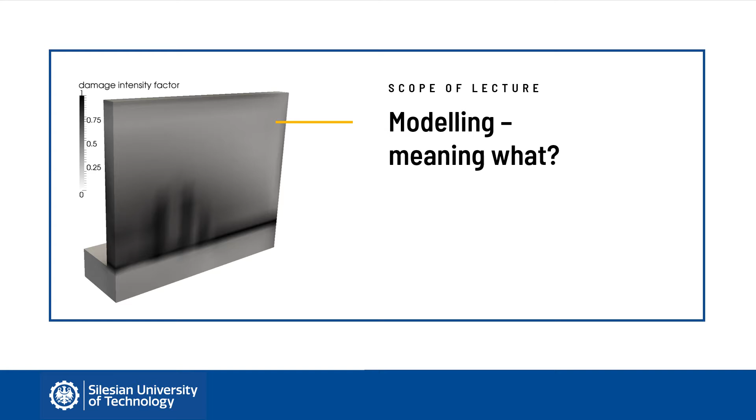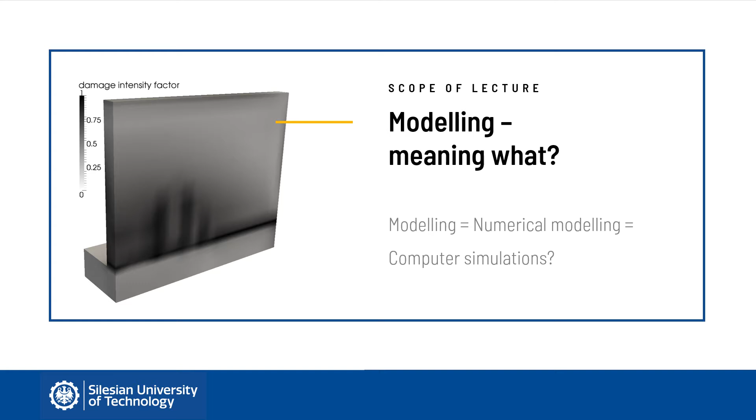I find it necessary to start with an explanation of the term modeling. Modeling is commonly associated with simulations of structures with computer implementations of mathematical models. Its meaning, however, should be broadened. By modeling, we should understand any activity in which a model of the structure is created to study its behavior under specific conditions.

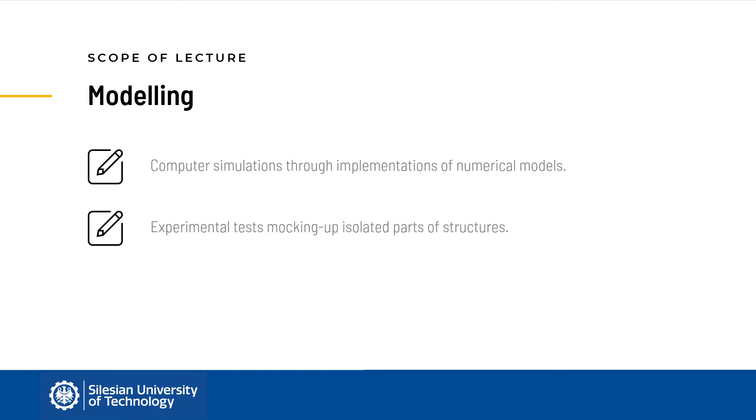Regarding reinforced concrete structures, modeling of cracking will of course mean computer simulations of cracking, its initiation and propagation, as well as prediction of crack width. Modeling of cracking, however, relates also to experimental tests in which isolated parts of the structure are mocked up to study the crack formation mechanism, cracking patterns, and crack width. The last but not least important aspect of modeling of cracking regards creation of analytical models derived from reinforced concrete mechanics. Such models are used to formulate calculation procedures for crack control in design codes.

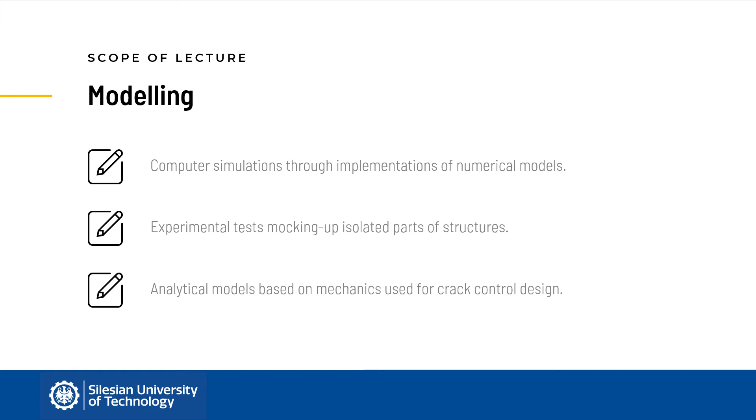Although my today's lecture will focus on conventional understanding of modeling by computer simulations, I would like to make some brief comments about other before mentioned aspects. However, to facilitate understanding the lecture, I will take liberty in making some introductory notes on the phenomenon of cracking. After that, I will briefly discuss how the real behavior of structural elements can be studied on a laboratory scale. I will make a concise overview of the analytical models used for crack control. Only then I will move to the main part of the lecture, in which I will introduce you to the approaches used in modeling of cracks, present damage and failure criteria developed for concrete, and discuss how to model the bond between concrete and reinforcing steel.

This being said, let us start with shedding some light on the background of cracking in reinforced concrete. In general, concrete cracks because it is a brittle material when subject to tensile strains. Nevertheless, cracks which can be formed throughout the whole life of the structure may have different origin, behavior, and effects on the structures.

The cracks may form as early as in the fresh concrete, around the time of setting, when concrete is still in plastic state. This early damage to concrete is usually manifested by a pattern of hairline cracks visible on the surface of the element.

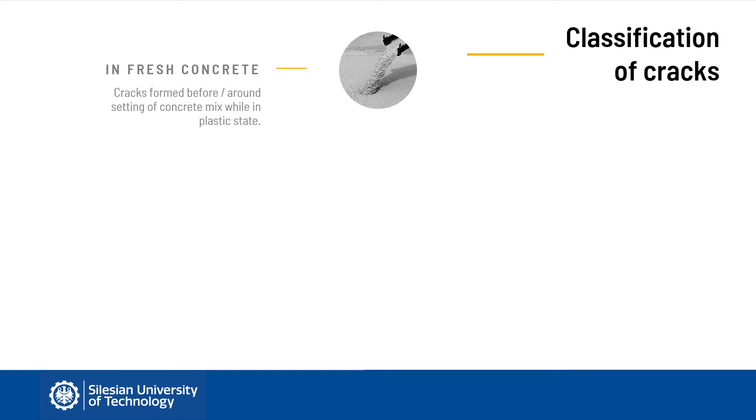Significant cracking can occur during the period of hardening of concrete, which may have significant impact on the structure during its service life. These early age cracks are formed due to the restraint of imposed deformations caused by cement hydration and may reach significant heights, depths, and widths, often exceeding allowable limits.

These cracks can grow further in hardened concrete when service loads are superposed on the structure. The most well-known cracking is that observed in mature concrete, which is caused by mechanical loading acting on the structure during its operation, but also other actions such as additional imposed deformations during service life.

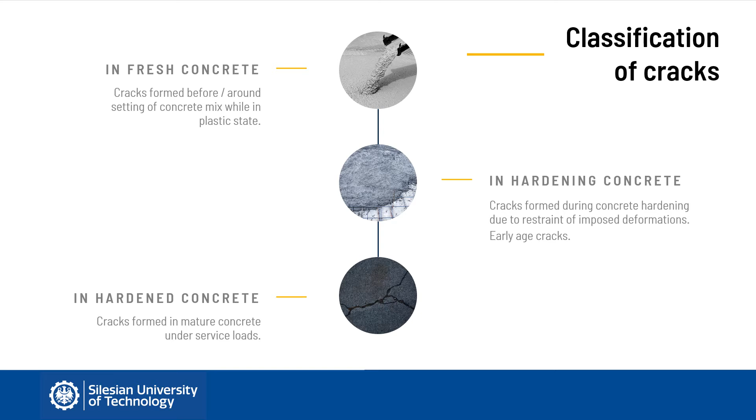Whatever the source of cracking, cracks can be further classified into macro and micro cracks. Micro cracks are small, pore-sized discontinuities in concrete components. They can be formed within the mortar or less frequently in the aggregates. Delamination between the aggregate and mortar is also not uncommon. They usually have random character and are spread over a larger area or through the volume of the element.

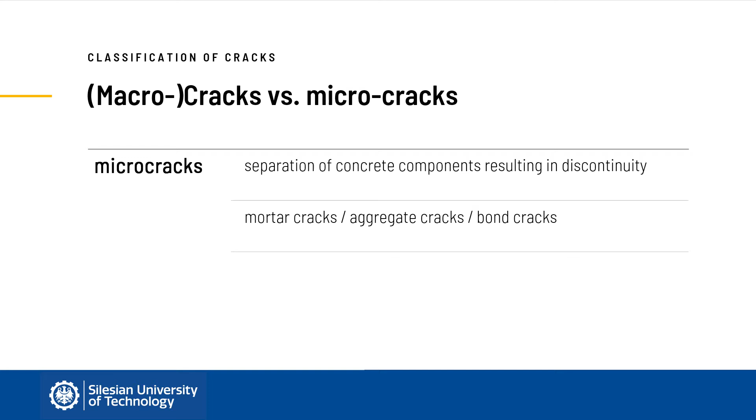Macro cracks, in turn, are what we usually call cracks. These are large cracks of considerable height and depth. The most important characteristic which distinguishes micro and macro cracks is the involvement of reinforcement in case of the latter ones.

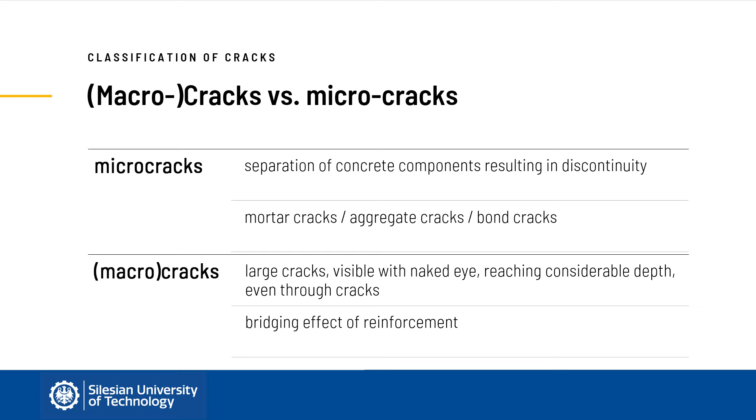Let me say a few more words about microcracking of concrete. As mentioned before, microcracks can form both at the surface and in the volume of the element. Damage to concrete always initiates with formation of numerous microcracks, some of which later concentrate and create large macrocracks when reinforcement becomes involved into transfer of stresses.

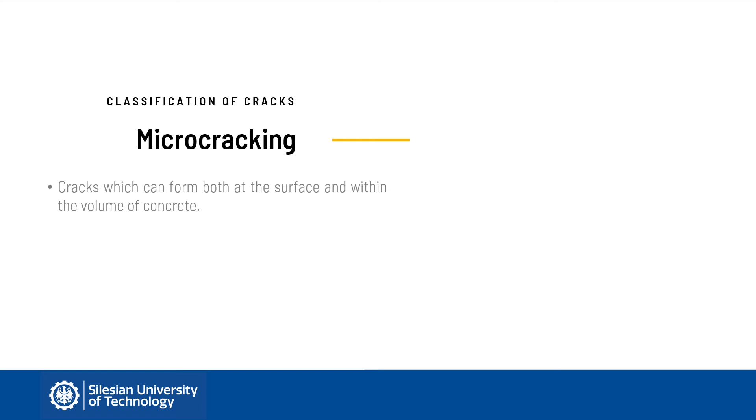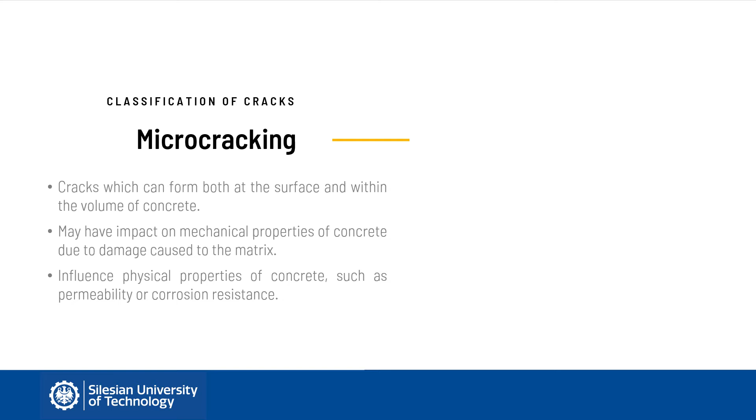It can be said that formation of microcracks within the element somewhat contributes to the growth of the pore structure. Therefore, microcracking may have adverse impact on mechanical properties of concrete, such as strength and stiffness, due to the damage of the matrix. It also influences physical properties of concrete, especially those related to its permeability.

Microcracking is the subject of studies on micro and mesoscopic level, which focuses on concrete itself, its morphology, chemical composition, and pore structure, and does not account for the presence of reinforcement and the impact of the composite work between steel and concrete on cracking. It will therefore not be the subject of this lecture.

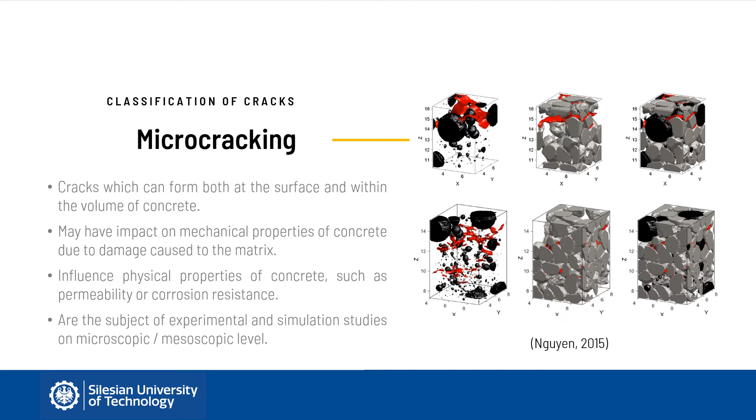We will focus on macro cracking of concrete. Let us look at what happens in a reinforced concrete element subject to increasing loading.

A crack is initiated when tensile capacity of concrete is reached in a certain location in an element. It is worth mentioning that the first crack may not necessarily form at the location of extreme tensile stress, as there is always a trade-off between local stress and local strength. Concrete is not a homogeneous material, and the so-called weakest link governs the crack formation process. It is one of the challenges in modeling reinforced concrete to define the tensile capacity in a sense of crack resistance of concrete.

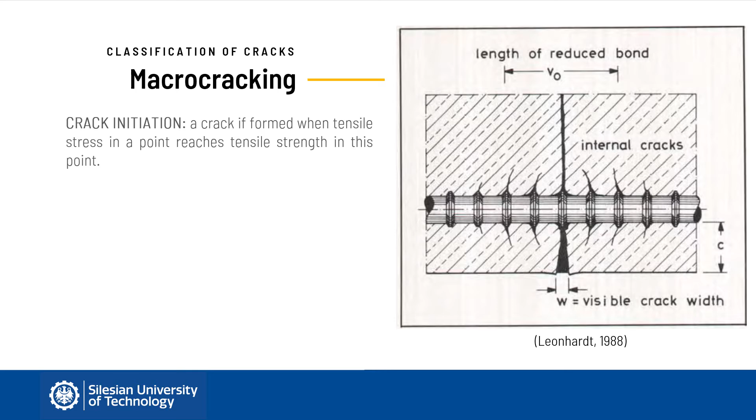As strains in the element increase, the crack starts to open. Mind that the width of the crack differs along its depth. Especially, it may be different at the level of reinforcement and on the surface. This is important when the width of the crack is measured in an element. On-site measurements usually provide the width of the crack measured on the surface, while in laboratory tests the measurement devices are often mounted on reinforcement and hence give the crack width at this location.

Such a crack is the primary crack. It is followed by internal cracks which are formed due to activation of the bond between steel and concrete.

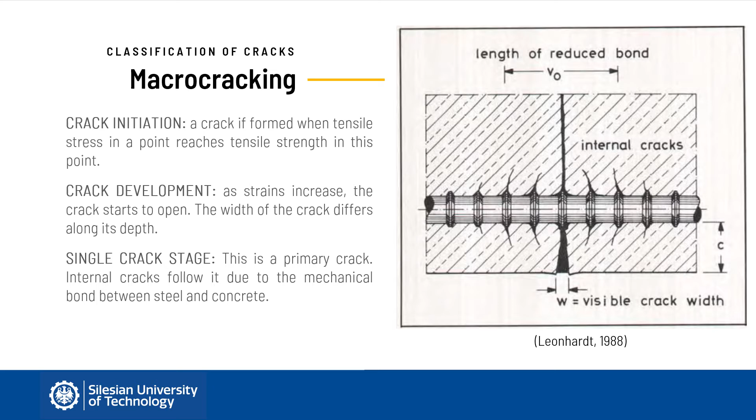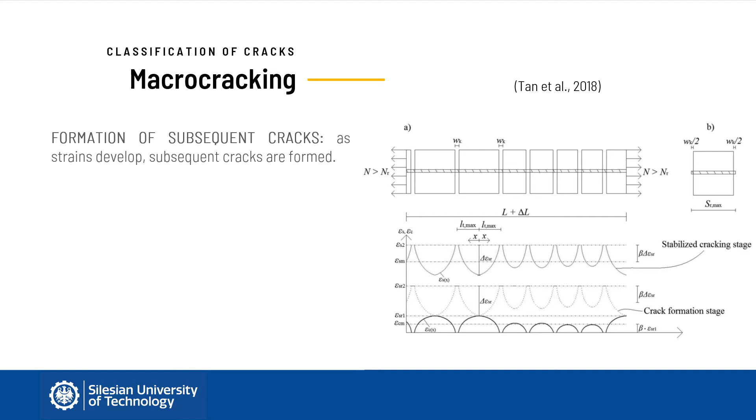As strains develop further, subsequent cracks are formed. At first, each crack is in a single crack stage, and there is no impact of the cracks on one another. At some point, however, the cracks are formed so close to each other that developing strains can no longer reach tensile capacity and cause further cracks to form. This stage is called the stabilized cracking stage.

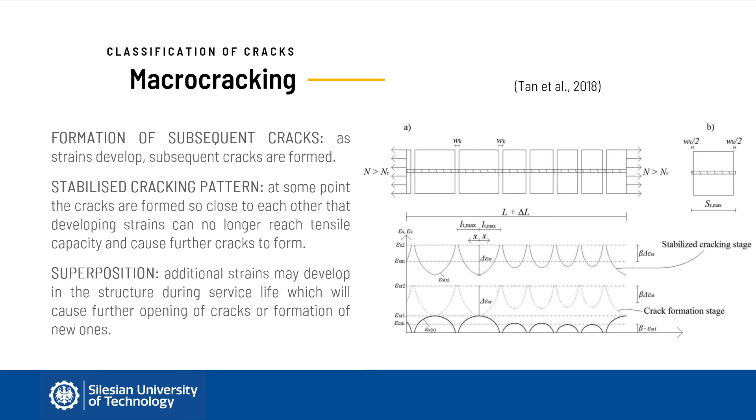Nevertheless, additional strains may develop in such a cracked element during its service life. Such additional loading may lead to formation of further cracks or opening of the existing ones. The latter case is especially dangerous because it may lead to exceeding the allowable limit value of the crack width. It should be remembered that concrete cracks, and this is usually acceptable until the width of the crack is below the allowable limit.

Different actions cause cracking of concrete elements, and by observing cracking patterns, an experienced structural engineer can determine the reason for cracking. This is because certain structural elements behave in a certain way depending on the loading scheme, their geometry, and support conditions. Understanding of this behavior is fundamental before any modeling activities are undertaken.

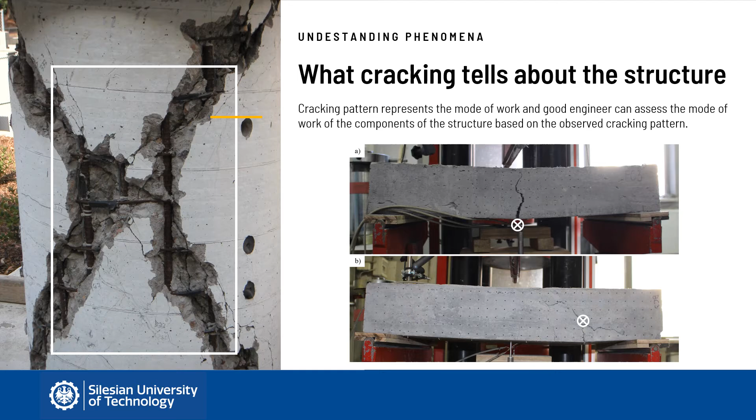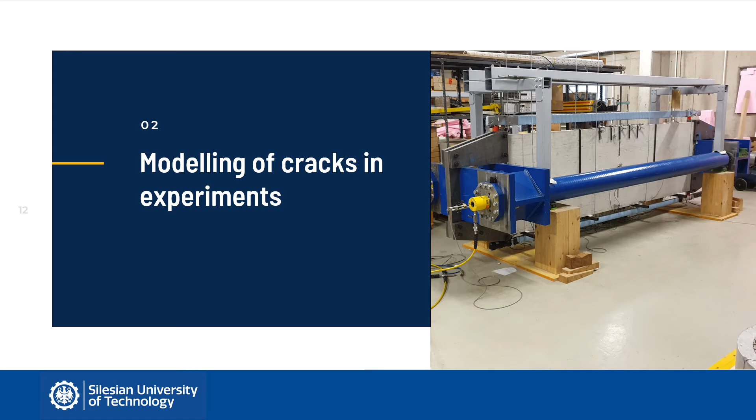So how to properly mock up a structure, or preferably its parts, and test them on a laboratory scale? As I have just said, initiation, propagation, and pattern of cracking is associated with the mode of its work. Let me recall here classical academic examples of flexural tests.

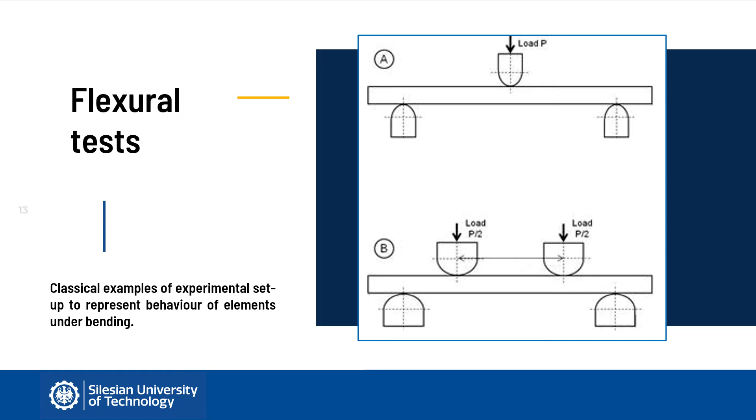The 3- and 4-point bending tests are designed to investigate the behavior of flexural elements such as beams and slabs. We know that the mode of work of such elements will be governed by either bending or shear. This will depend on a number of parameters such as the shear span to effective depth ratio or related to the applied longitudinal and transverse reinforcement. The mode of work will be manifested by the mode of failure, which we can distinguish by formation of either a flexural crack in the span or a shear crack near the support.

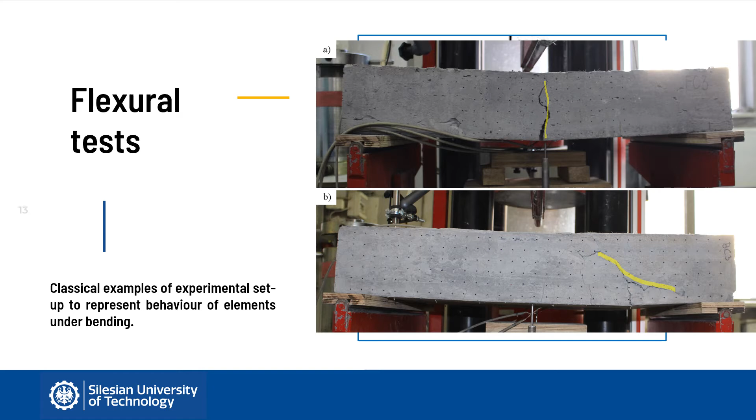There is a wide range of tests which can be performed to characterize cracking in reinforced concrete structures and structural elements. As for cracking due to mechanical loading, typical tests of concrete under tension or bending are performed, in which the load can be either monotonic or cyclic, and with a different rate of applied strain. This allows modeling of the behavior of reinforced concrete elements under various typical as well as accidental loads to which they can be subjected during service life.

When concrete elements are subjected to the action of imposed deformation, their cracking resistance can be controlled with tests of restrained deformations, including ring tests and linear frames, for example temperature stress testing machines.

If cracking can be caused by superposition of mechanical loads and imposed deformations, isolated elements or even parts of the structure can be mocked up in real scale. In this case, it is essential that the actual support conditions are properly represented in the isolated tests.

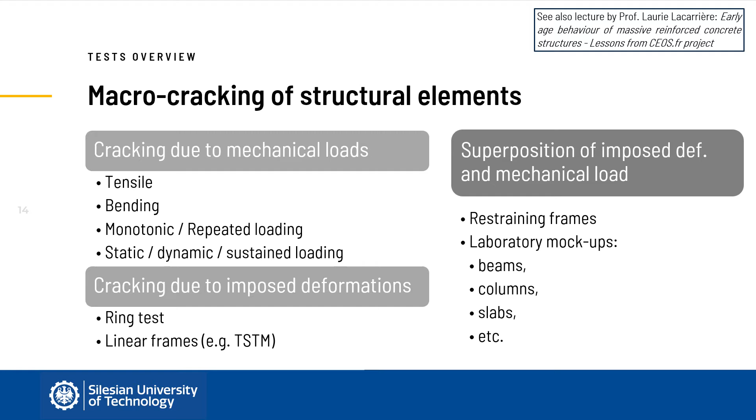The main aim of modeling cracking is to provide robust design procedures for crack control. That is why before I move to the complex simulations of cracking, I would like to make a concise overview of the analytical approaches.

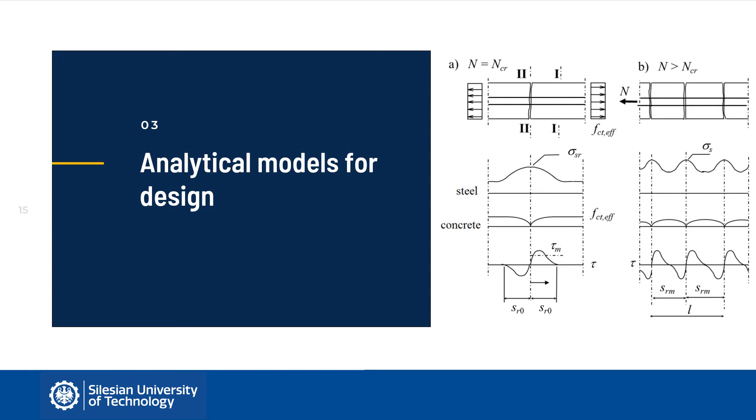In general, the analytical models for crack width calculation define the crack width as a product of crack spacing, or slipping length, and strain difference between the cracks, which is called crack-inducing strain.

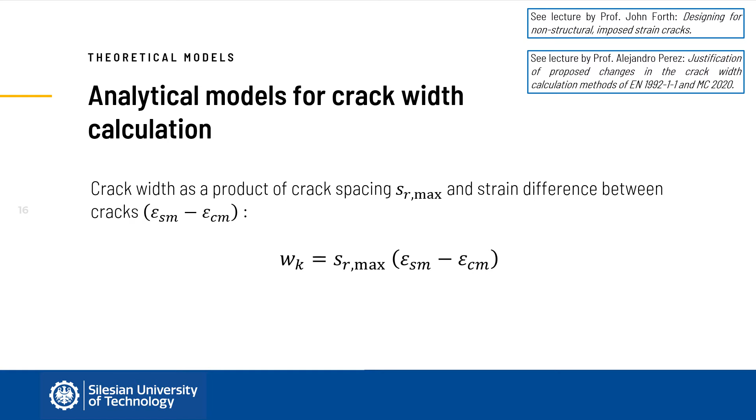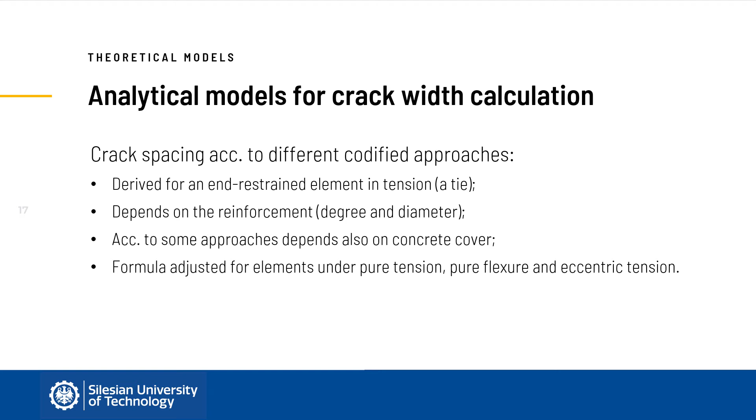Various approaches provide different methods to calculate crack spacing, and there are some similarities between them. First of all, in the majority of cases, crack spacing is derived for an end-restrained element in tension, so for a tie. Crack spacing depends on reinforcement, specifically the degree of applied reinforcement and diameter of bars. According to some approaches, it also depends on concrete cover, although there is no agreement on this. The formula derived for an end-restrained element is further adjusted to represent any element under tension, not necessarily pure tension, but also pure flexure and eccentric tension.

The analytical approaches also provide guidance on how to determine the value of the crack-inducing strain. Usually two representative cases are distinguished. The first scenario is that of an element restrained at its ends. Since cracking in such an element changes forces globally, the crack-inducing strain depends on the degree of applied reinforcement. In these methods, this strain is usually a function of the degree of reinforcement and tensile strength.

The other scenario is that of an element restrained at its base. In this case, cracking changes forces locally, and the crack-inducing strain depends on the restrained part of the strain and the extensibility of concrete, meaning the ability of concrete to expand between the cracks.

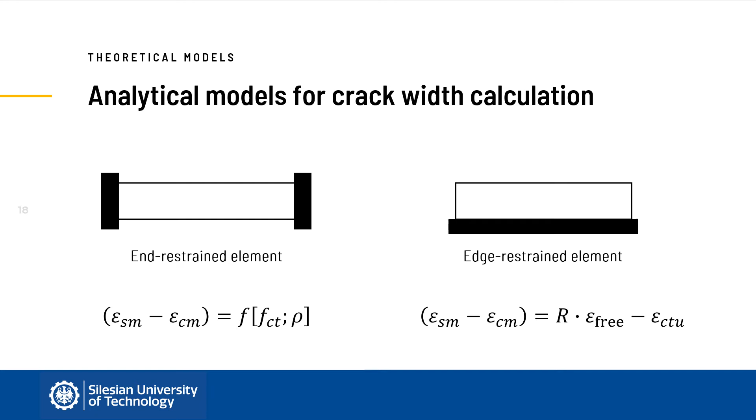Numerous methods for crack width calculation can be found in the literature on the subject. There are a lot of similarities between them. However, there are also discrepancies which must be accounted for in the robust use of these methods. In general, the following aspects should be addressed in the model for crack width calculation.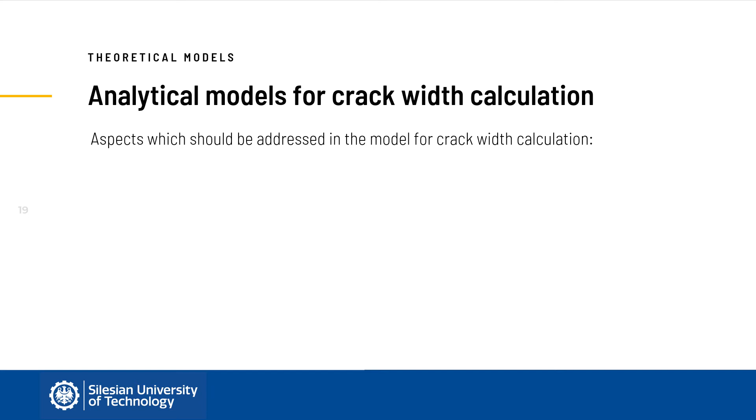The effective tensile strength, so the strength for which cracking occurs. The effective tension area, so the area of concrete section which is effectively engaged in transferring tensile stresses due to the limited range of impact of reinforcement. Influence of concrete cover. Tension stiffening effect of steel due to the bond between steel and concrete, and an appropriate bond law to represent this behavior.

Whether the model is based on a mechanical approach or is calibrated, which will limit its range of application to the cases based on which it was derived.

Distinction must be made for which crack stage calculations are made, and preferably calculation procedures should be differentiated to account for different behavior of cracks in the crack formation stage and the stabilized crack stage.

Distinctions should also be made for cracking at early age versus long term during service life. The conditions for which cracking may occur during hardening of concrete are different than in the case of mature concrete. Moreover, the superposition of early age and long-term effects on the final width of crack should be accounted for to assess precisely the expected crack width.

Finally, the model should account for the superposition of the effects of imposed deformations and generic mechanical load on the total width of the crack.

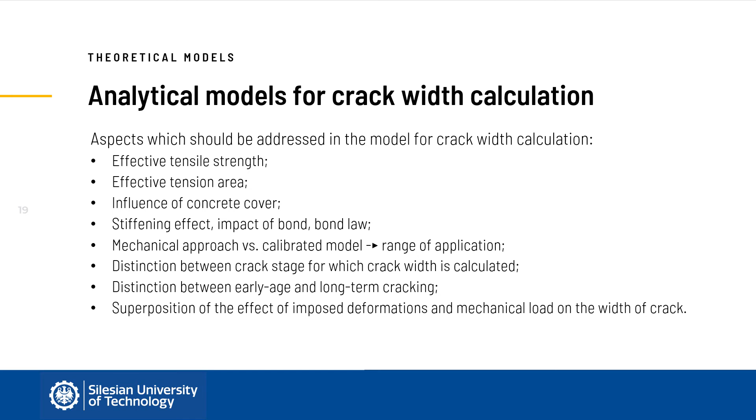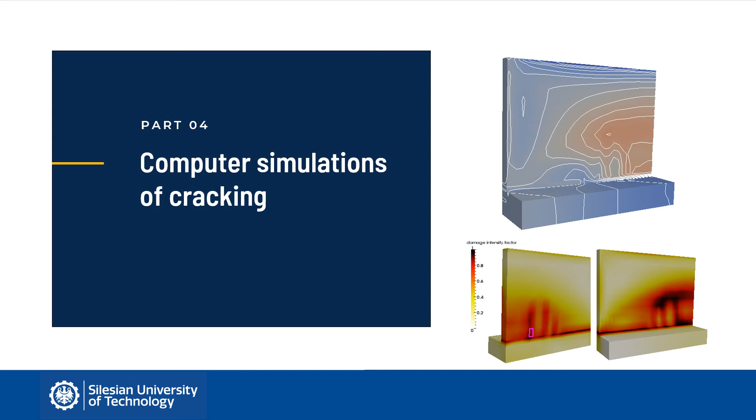All these aspects are also important when using more advanced models, such as those used for computer simulations. That's why, having in mind everything said so far, let us proceed to the main part of this lecture about computer-aided simulation of cracking.

There are two basic approaches to modeling cracks, both usually based on the finite element method. The first approach is a discrete model of cracks, in which, as the name suggests, cracks are represented in a discrete manner. This approach is suitable for modeling the behavior of elements with a few dominant cracks with known location and direction of propagation, for example in laboratory experiments.

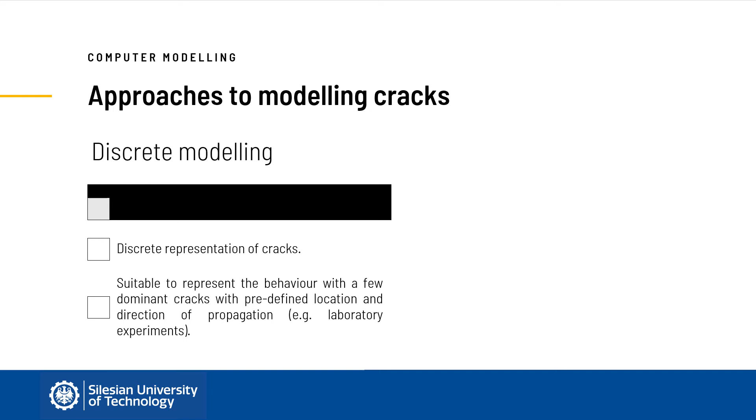The second approach is a smeared model of cracks, in which cracks are not represented as geometrical entities. Thanks to the ease and flexibility of use of this model, it is suitable for analysis of generic structures with many cracks of small widths.

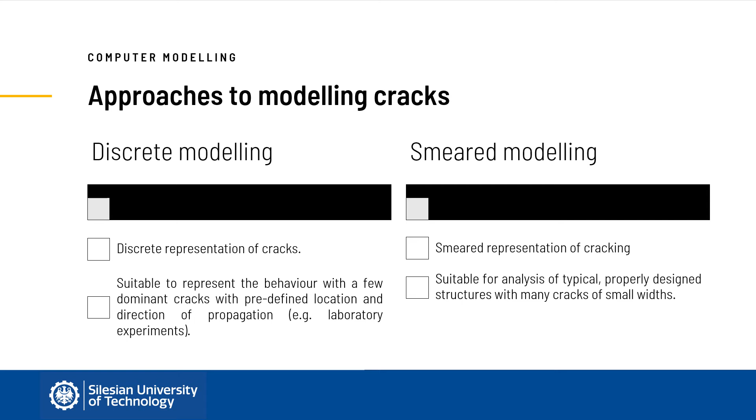Let us have a closer look at each approach. In a discrete model of cracking, each crack is modeled directly as a discontinuity of the finite element mesh. When the force in the node at the tip of the crack exceeds tensile capacity, the node is split in two and the tip of the crack propagates to the next node.

The advantage of this method is the possibility to determine the exact location of the crack and follow its growth. On the other hand, remeshing must be performed after each step in which a new discontinuity is introduced. This is computationally challenging and hence is rather not used for modeling whole structures and large structural components.

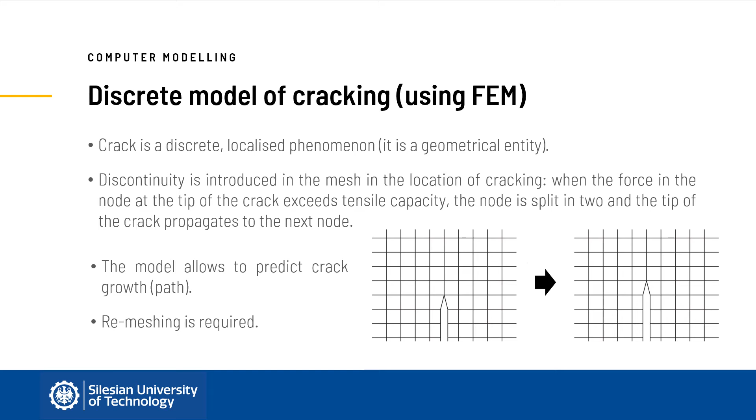For that purpose, the smeared cracking model is employed. In this approach, crack is not a discrete phenomenon and no discontinuity is introduced to the mesh. Concrete in this approach is treated as a continuum, before cracking as a homogeneous solid with isotropic properties. After cracking, the cracked finite elements are assigned with modified properties and the material of the cracked part is no longer isotropic.

Usually, the cracked element can no longer transfer tensile stresses, but can still transfer shear stresses. Characteristics of each finite element before and after cracking are defined by the applied damage criterion.

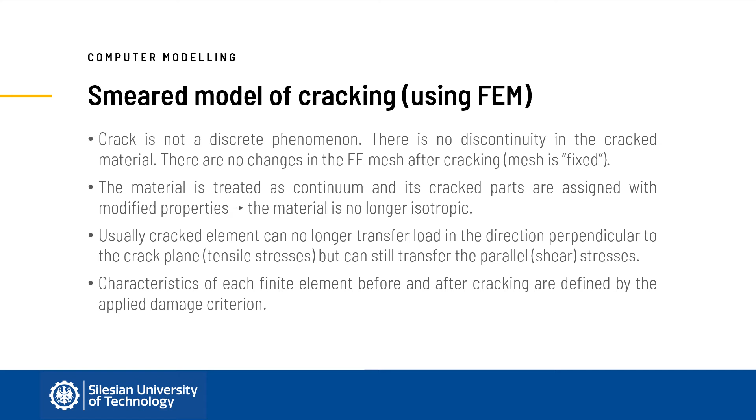The simplest way to determine whether cracking occurred is to compare the tensile strain or stress in the structure with the tensile capacity of concrete. The main challenge is to define this tensile capacity. If concrete in the whole analyzed element is assigned with uniform mechanical properties, the question usually is which tensile capacity should be chosen to represent cracking resistance of concrete.

One of the choices is to operate with mean tensile strength, while others advocate to use a 5% quantile value to account for the effect of the weakest link. If formation of the crack is expected to happen in a certain location, localized strength reduction is introduced, which is an analogical concept to the introduction of a notch in the beam.

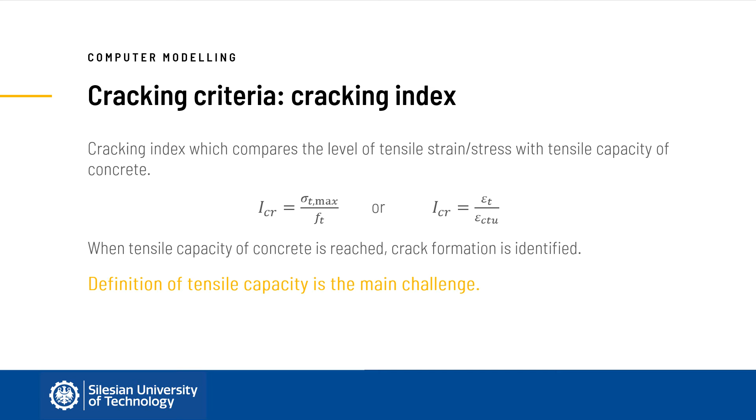Once the cracking is initiated, the behavior of the cracked material must be defined to follow the progress of cracking. This behavior is described by damage models. Damage models are based on the assumption that compressive stresses are relatively low with respect to the compressive strength of concrete and that concrete degrades in tension. It is assumed that a part of the finite element is sound and a part is cracked. The sound part of the element can transfer further stresses.

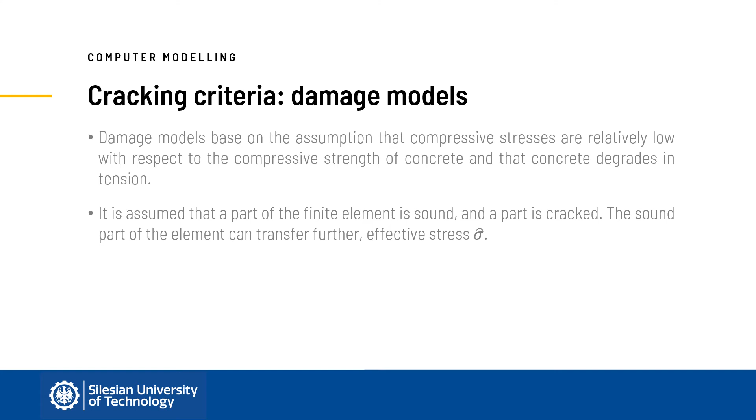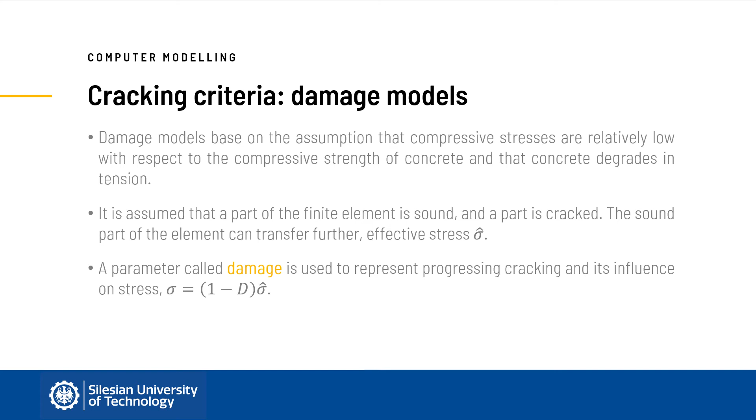The level of stress which can still be transferred by the element in which cracking was identified is defined by the parameter called damage. For an uncracked element, the damage is zero and the element can take full stress. With progressing damage to the element, associated with progressing cracking, the value of the damage parameter increases and the efficiency to transfer stresses by the element decreases.

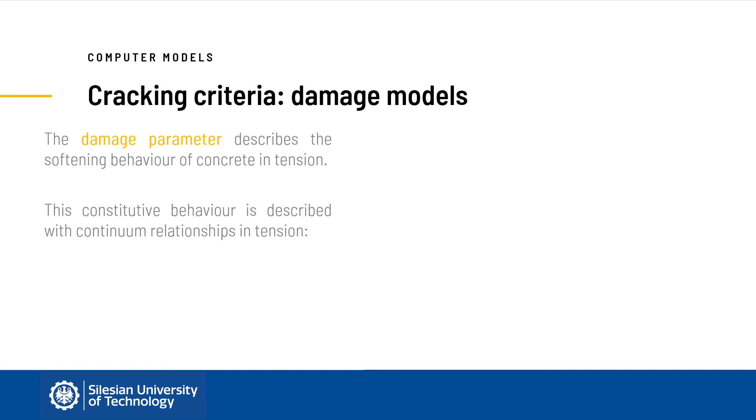This means that the damage parameter describes the softening behavior in tension. The constitutive behavior of concrete in tension in the damage models is described by two relationships: the stress-strain relationship before cracking, which for concrete is usually defined by a bilinear relationship, and the softening behavior after formation of the crack associated with the crack opening.

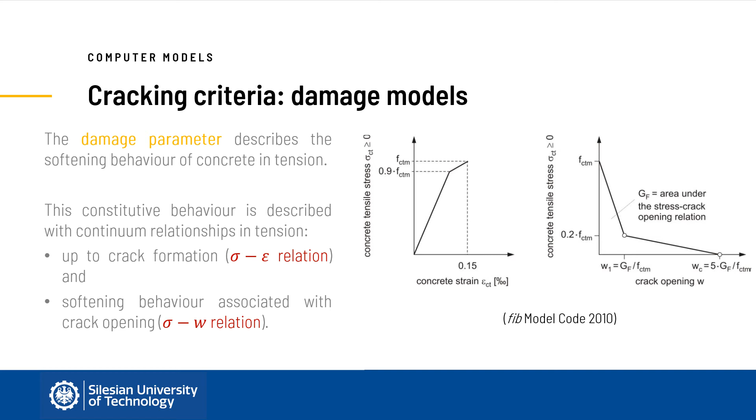In smeared cracking models, in which the crack is not physically represented, the crack opening is simulated with the so-called crack strain. The width of the crack can then be calculated from the value of this cracking strain. To make this solution independent of the size of the mesh, which would otherwise impose the location of the crack and its development, the characteristic length, also called a crack bandwidth, is used, which depends on the fracture energy of concrete.

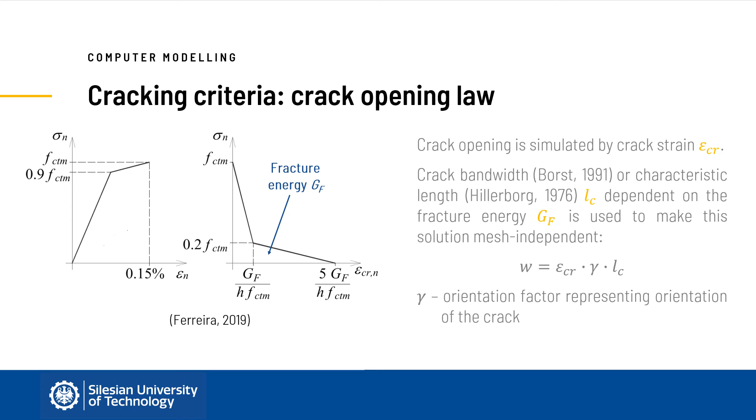Damage models are usually based on one-dimensional analysis of stresses. That is because in the elements analyzed with these approaches, there is one dominant principal stress which is tensile and which can cause cracking. However, some structural concrete elements undergo failure in complex stress states.

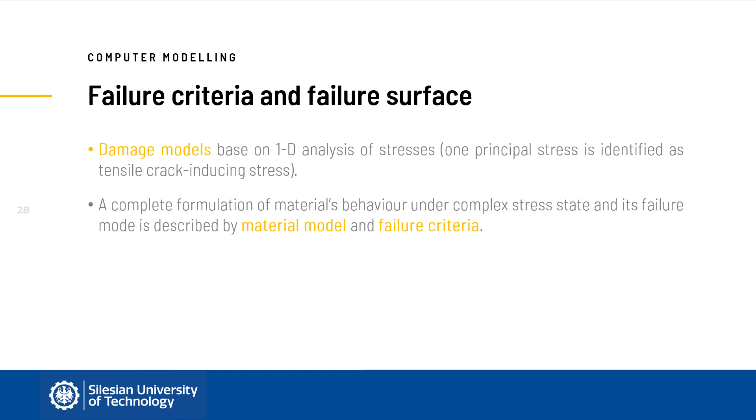Such complete definition of the material's behavior under any stress state is done with the material model and failure criterion. For a three-dimensional stress state, failure criterion can be represented with a failure surface in the space of principal stresses. Points on the surface represent stress states for which failure occurs.

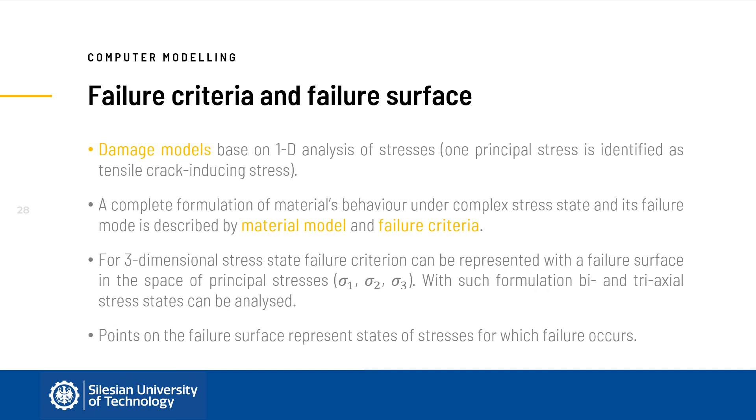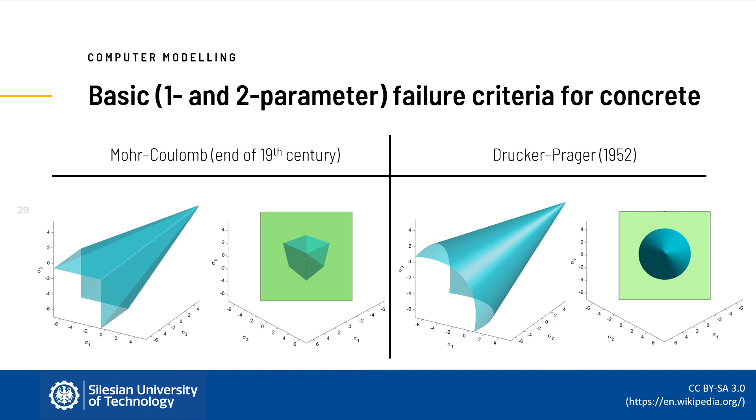Failure criteria for concrete have been developed since the end of the 19th century and have been improved to better represent the behavior of concrete. The number of proposed failure criteria and peculiarities of each proposal makes the subject so broad that it could be the topic of a separate lecture.

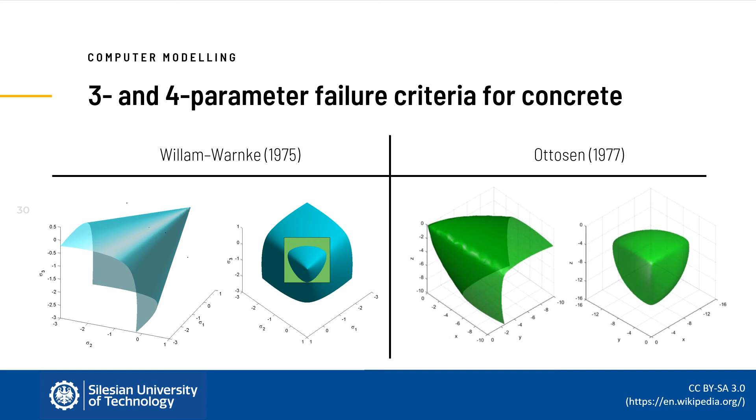What is important is that the failure surfaces are created based on laboratory tests of concrete for characteristic stress states, such as uniaxial, biaxial, and triaxial tensile and compressive strength. Strengths of concrete under these specific stress states serve as a basis for creation of the surface.

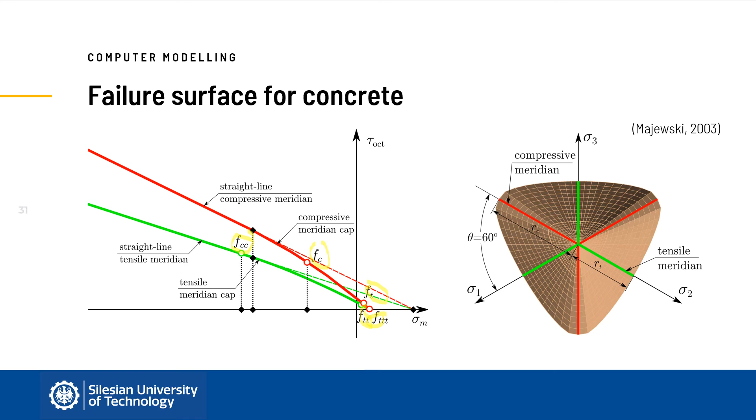If the applied material model accounts for plasticity, such as in the case of concrete in compression, two surfaces are defined: the failure surface and additionally the yield surface, and they are usually based on the same criterion.

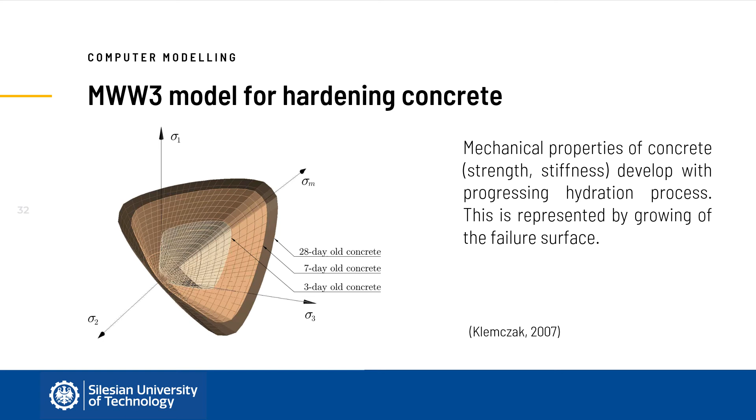It is interesting to add that failure criterion can be used not only for mature concrete, but also for concrete in the hardening phase. Since the surface is defined based on the strengths of concrete, and given that these strengths develop with progressing cement hydration, this is represented by growing of the failure surface. From the point of view of modeling, the calculations of hardening concrete are performed with an incremental approach for discrete time steps. In each step, the failure surface is redefined according to the assumptions of the failure criterion for the current values of the strengths.

The applied material model defines the path of the stress within the surface, as well as the behavior of the surface when it is reached. Let me explain it on an example of the standard material model of concrete under uniaxial compression.

This elastoplastic model requires definition of both yield surface and failure surface. As long as stress is below the elasticity limit of concrete, the material behaves in an elastic manner and the point representing the stress is inside the yield surface. When elasticity limit is reached, it means that the point is on the yield surface.

Now the applied flow rule defines the behavior of the material under increasing strains. In case of isotropic hardening, this is manifested with uniform growing of the yield surface until it reaches the failure surface and coincides with it. This means that the material has reached its compressive strength at this point.

The descending branch of the stress-strain diagram represents the behavior of the failure surface after fracture, which in this case would be progressing degradation of concrete until total failure.

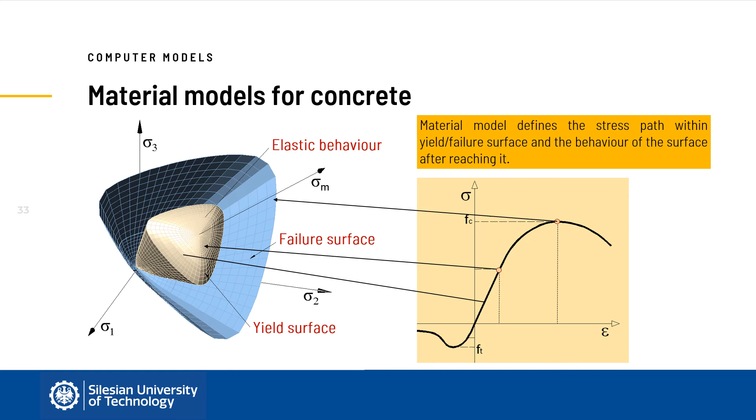Depending on the location where failure surface is reached, fracture is manifested with different modes of crack. If failure surface is reached within the zone of tensile stresses, a splitting crack is formed. Such a case can be simplified to a one-dimensional damage analysis. In case concrete fails under compression or any complex stress state, the crack mode can be different.

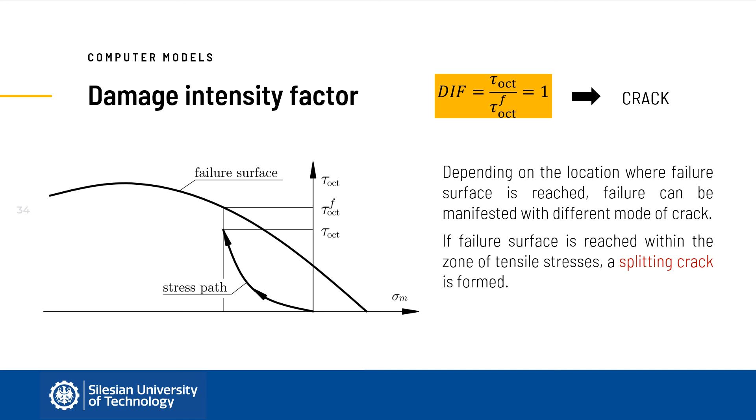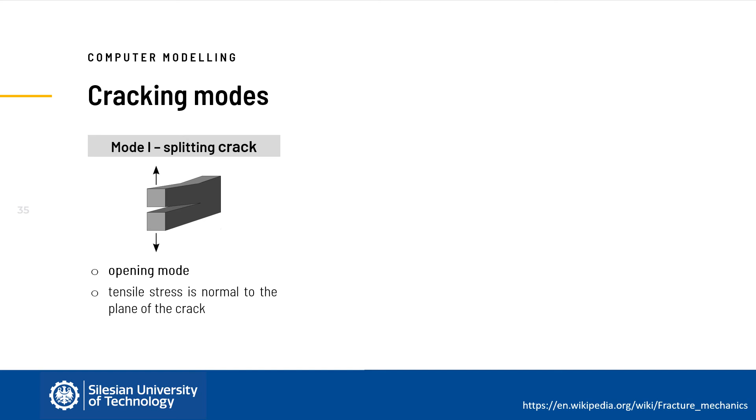In general, there are three modes of cracks. Opening mode, in which a splitting crack is formed - this is a commonly known crack which is formed under tension. When concrete fails under compression, such as in a uniaxial compression test, a sliding mode of fracture occurs with a shear crack. Finally, a mixed mode of the two can occur, which leads to a tearing crack.

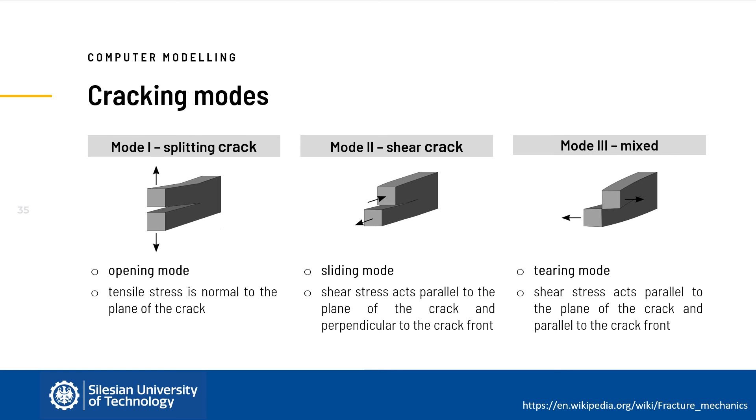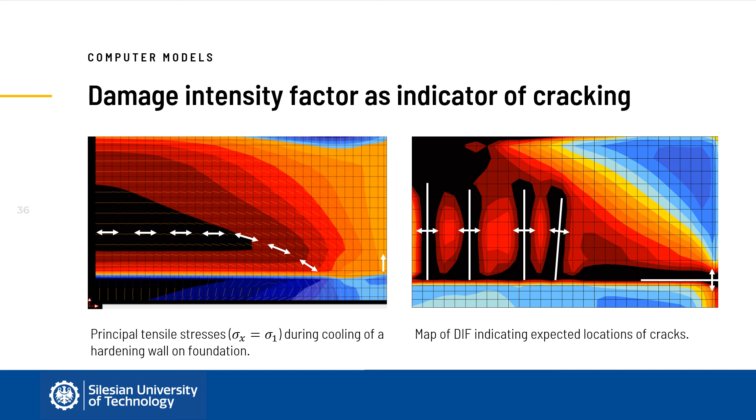A lot has been said about modeling of concrete, while modeling of reinforcement is of the same importance. Let me briefly present what approaches are available for modeling reinforcement.

First of all, the distributed or smeared model, in which reinforcement is modeled with the use of a substitute material composed of concrete and reinforcement and having strong anisotropic properties, with the reinforcement located in the direction of the real reinforcement.

Alternatively, an embedded model can be used, in which reinforcement, modeled with a bar, is superimposed on the concrete elements in the finite element mesh, and bars pass through concrete elements in an arbitrary manner.

Finally, the most commonly used model for reinforcement is a discrete model. In this model, reinforcement is represented with its real location and real material properties. It is modeled with linear one-dimensional elements, bars, which are connected with the nodes of a two-dimensional or three-dimensional concrete element. Deformation compatibility is ensured at the nodes between steel and concrete, and an appropriate bond law must be defined to describe what is happening at the interface between reinforcement and concrete.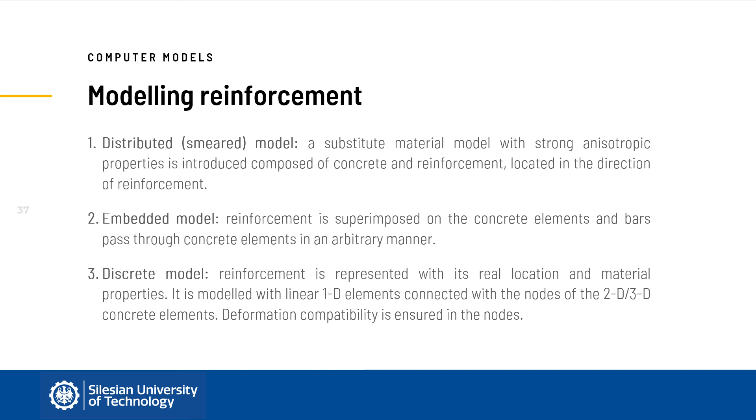The last property crucial for proper modeling of reinforced concrete is the bond between reinforcing bars and surrounding concrete. As said at the beginning of this lecture, a fundamental characteristic of a macro crack is the bridging effect of reinforcing steel on the formation and development of cracks. Thanks to that bond, in cracked cross-sections, the tension forces at the crack are transferred deeper into the uncracked parts of the concrete element by the reinforcing steel.

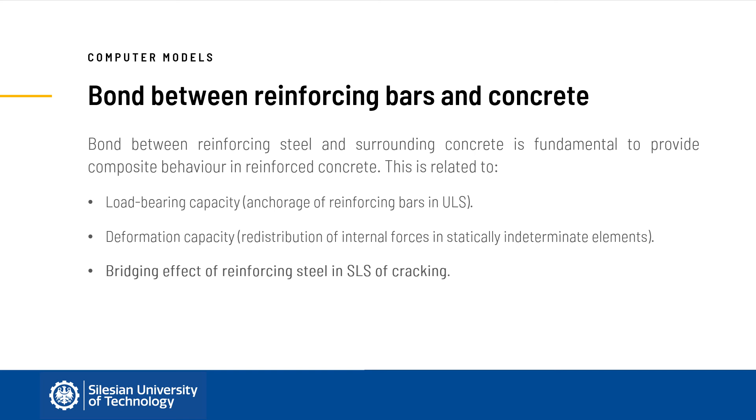Let us imagine the case of a tie in a crack formation stage. The absolute displacements of steel and concrete along the transmission length are different. This relative displacement generates bond stresses between concrete and steel. Along the transmission length, a part of the tension force of the reinforcing steel acting in the crack is transferred into the concrete by bond. This effect is called tension stiffening.

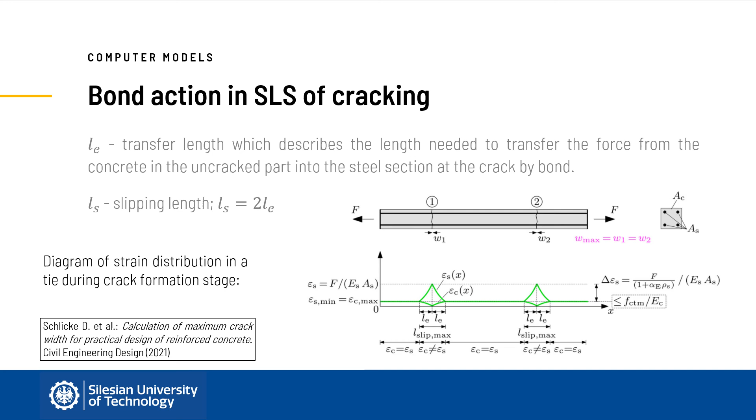This bond behavior depends on a number of factors, including the type of loading, factors related to concrete such as concrete properties, concrete cover and casting position, and factors related to reinforcing steel, such as its class, the applied diameter of bars and their spacing, the condition of the bar, and transverse reinforcement.

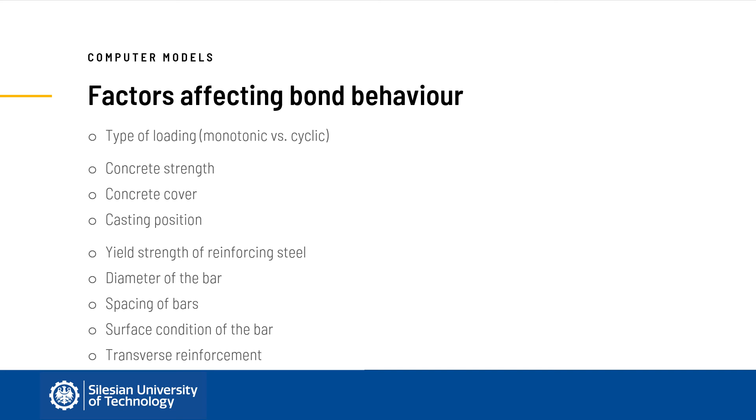In practical engineering applications, it is convenient to assume that the mean bond stress is independent of the crack width. In such applications, for example in design codes, the mean bond stress is represented in relation to the mean tensile strength of concrete. However, it must be remembered that bond stresses change with the slip as the crack develops, and it is important to account for this fact in the model to obtain realistic results.

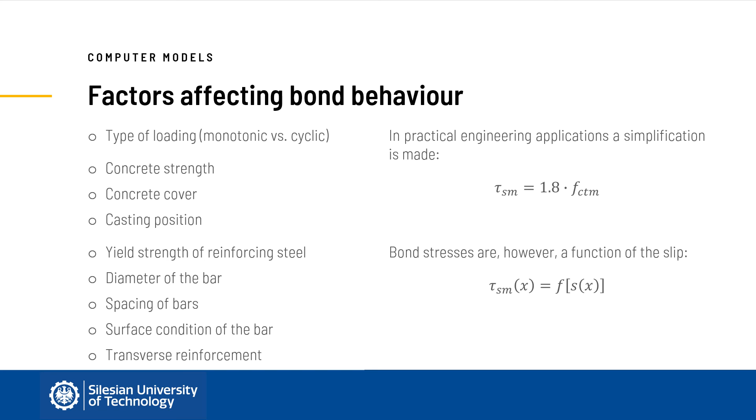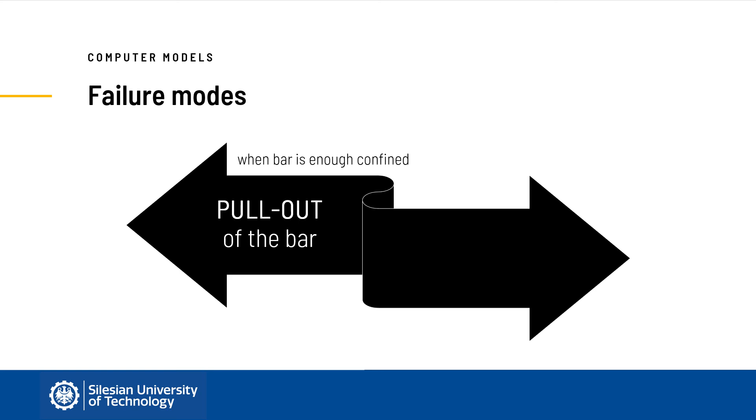The bond-slip law also depends on the mode of failure of the element under tension. When reinforcing bars have enough confinement provided by thick concrete cover or secondary reinforcement, the bar is pulled out of the concrete volume. In the opposite situation, when confinement is insufficient, the element fails by splitting of the concrete cover.

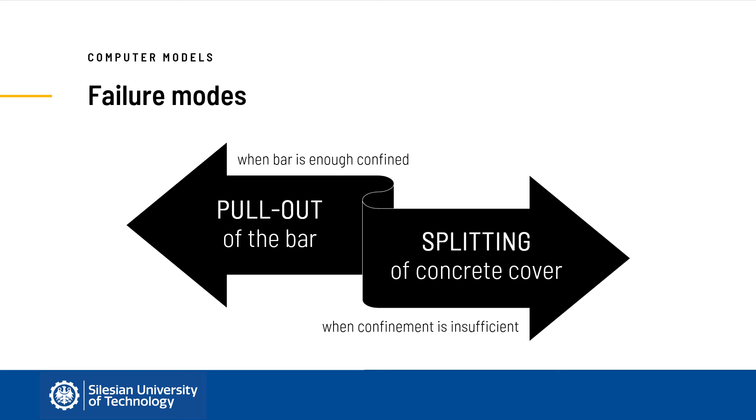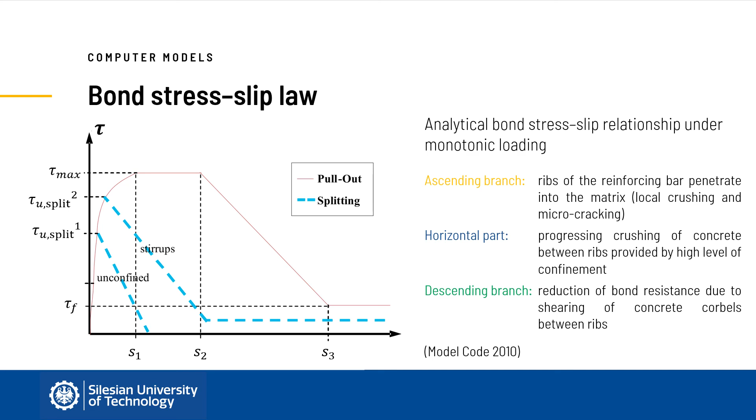I would like to close this lecture by presenting two examples of application of crack models. The first is related to the use of a discrete crack model to follow the propagation of a crack in a notched beam and verify the model against the experiment.